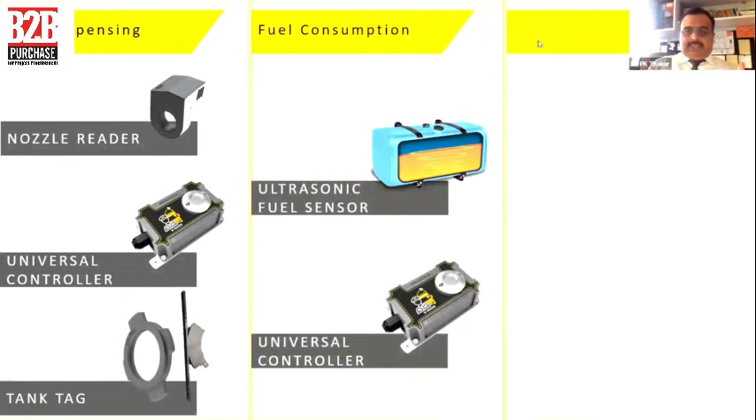So these are very small components which are being used along with the equipment to achieve this. We can see some nozzle readers, a universal controller, tank tags, an ultrasonic sensor, and some iButtons.

So in one set of equipment, we have to install these ultrasonic sensors, the universal controller, and these iButtons. And for diesel dispensing purpose, we have nozzle readers.

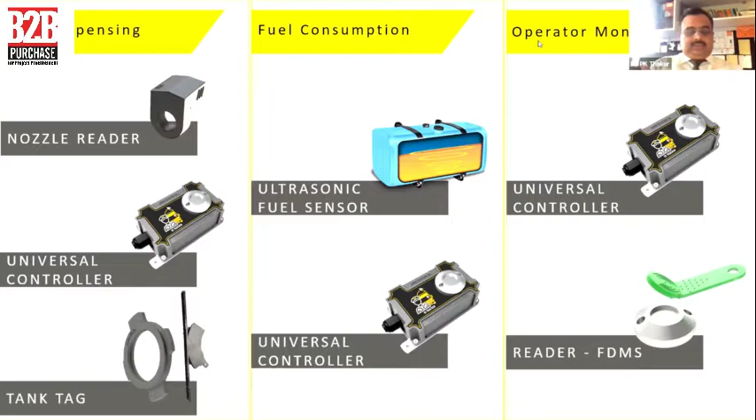And of course, in the fuel tank, we have tank tags, which are already fitted permanently with the equipment, which cannot be altered, which cannot be removed, which cannot be reutilized. This is one-time fixed, and if somebody is trying to remove it, it cannot be done.

So these are the four components which I mentioned, and this is a universal controller where the signals from these components are coming and being accumulated here, and this data is bidirectional, which is accumulated at the cloud.

Of MOVA, and in column 3 you might have seen this is SAP data, and through a tunnel this some very restricted data is being transmitted and shared with mobile cloud, and similarly from mobile cloud data is also transmitted to our GRIL cloud.

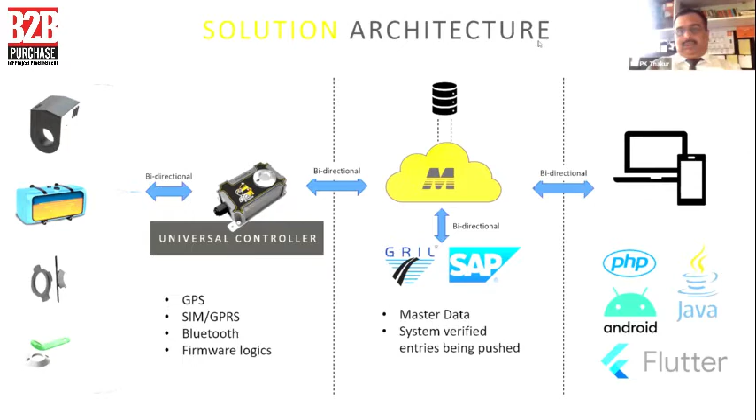So this is bidirectional data, and from this we can read or monitor either through desktop or through an app application on a mobile through Android.

So this is the dashboard where we club all this data together and finally monitor it in one glance. Here we have data of equipment monitoring, here we have operator monitoring, here how diesel dispensing is being done, how fuel average is coming up for all the equipment, all the assets of the company all together in one room.

If there is any fuel drop, which is basically, in other words, we will say a fuel theft, and how we are monitoring this, and some GPS alerts are there, of course, which is giving an administrative control on the equipment, on the vehicles, which is being monitored, their movement, their operations, their idling, their breakdown, and all.

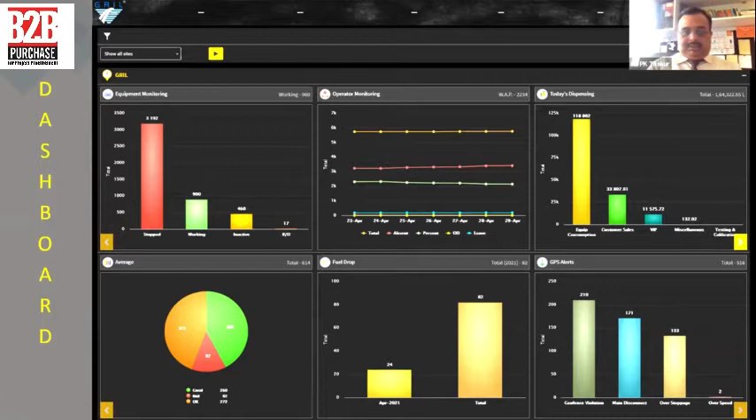And of course, the preventive maintenance. So all these 5-6 issues for which we are struggling at site level, we tried to provide a solution all together at one platform under one umbrella.

So here, this is the equipment real-time monitoring, how this is working. And we can find that out of the complete list or set of equipment, 2701 equipment is stopped as of now. Similarly, 1382 is working, some are idling, some are on breakdown, and so on.

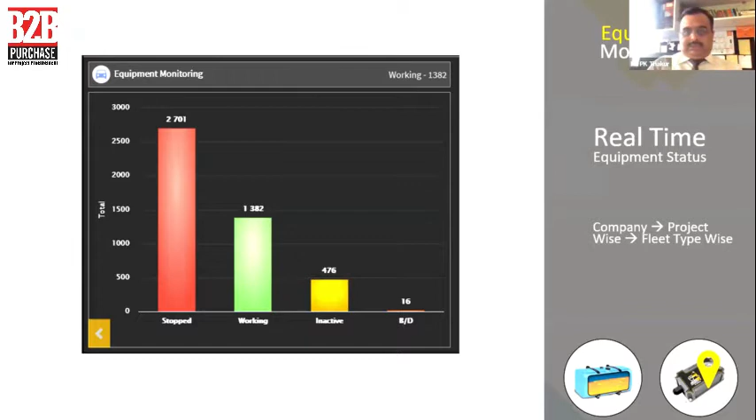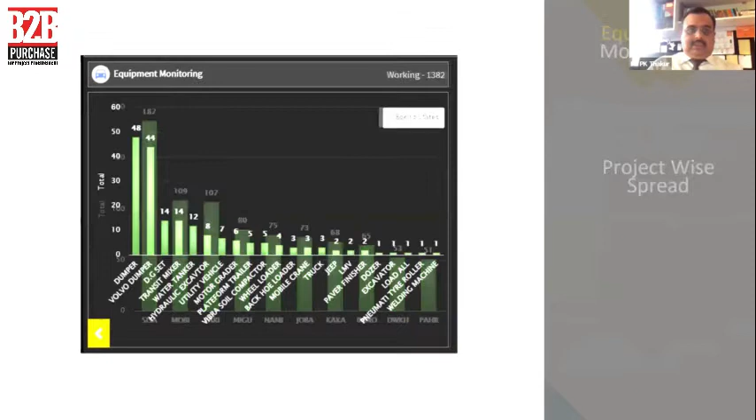Next, if we see the equipment which are working, project-wise, we can see how the equipment are working. Now, at one particular project, if we go through the class-wise equipment, which is dumpers, excavators, and many more other classes or categories of equipment, we can see how these equipment are spread on one particular project and how many are working.

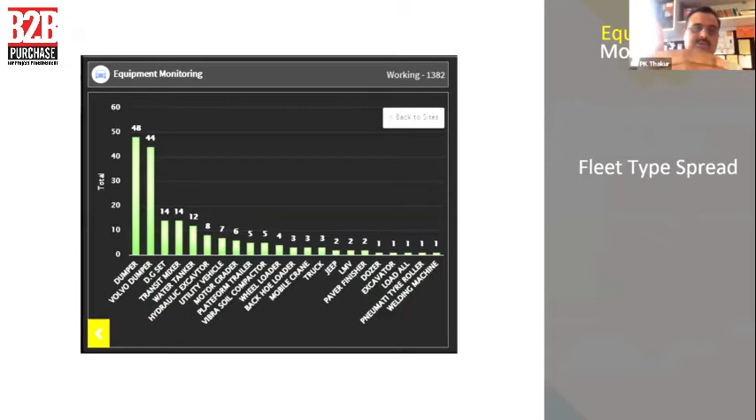Similarly, the same thing is there for manpower monitoring. Almost little less than 6,000 manpower we are having in our plant and equipment division, which is connected through this system.

And as shown on the right side of the screen, there's an individual iButton issued to individuals, all employees, whoever is the operator or driver. This iButton is fixed in the cabin of the machine.

And once this iButton comes in contact with this central controller, the machine will be started. Only then will ignition start. And once the ignition starts, immediately this information will be recorded in the software that this particular person has started the machine, and his attendance starts.

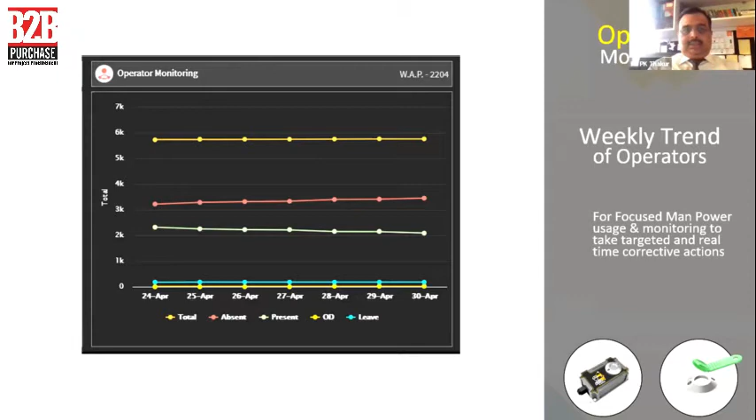So based on that, we can see how many manpower we are having, how many are working, how many are absent, how many are on outside duty, or if somebody is on leave. So this data can be captured and analyzed further.

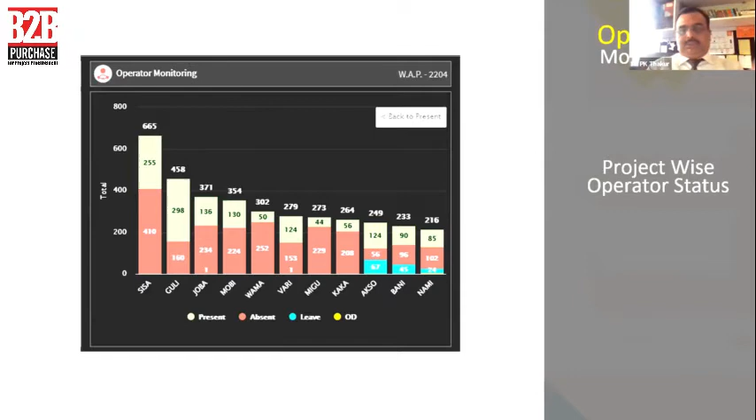Same data can be presented in this way for various projects - how many persons are present, absent, or project-wise distribution of their operator and manpower. Similar is their availability, if we want to see on weekly basis, monthly basis, half-yearly basis, or annual basis.

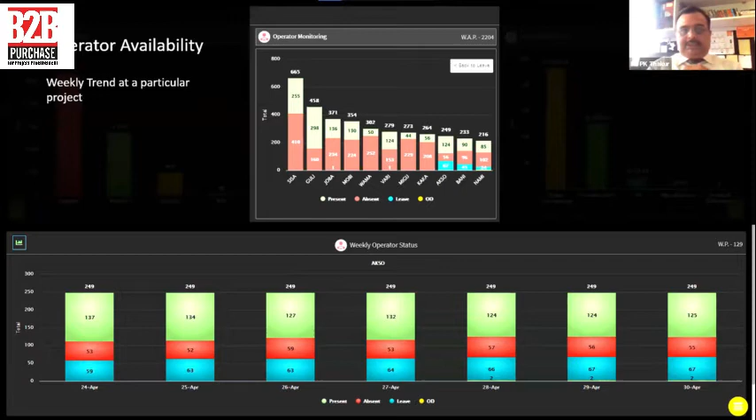So here is a sample which we have presented here just for 1 week - how many manpower, what is the trend of attendance we are having at various projects.

And if we want to drill down furthermore, we can see the individual manpower, their leave, their absent, present - so all are connected up to the bottom level. So a person sitting in the head office, if he wants to find out the detail of all 6,000 manpower they are having in that team, they can drill down very well and find out ultimate information up to the last manpower in the team.

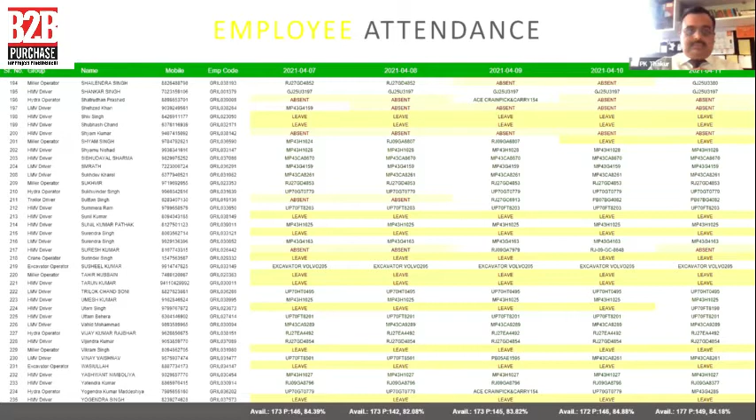So through these three small devices, we can capture all this data, and we can find out how much quantity of fuel is dispensed in our equipment, and how much we have given to others, meaning some contractors or maybe some individuals.

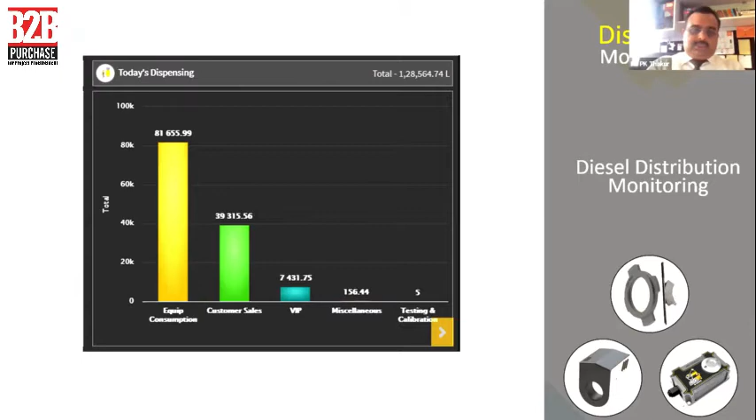What is the distribution of fuel? If you want to see project-wise, this will be like this. If you want to see class-wise, this will be like this. And if you want to see how this was distributed along with individual equipment, we can find out very well.

So we can find the data of 1,28,564 liters which was distributed on that particular day, from that level down to individual level - in which equipment, at what reading, how much quantity of fuel we have dispensed.

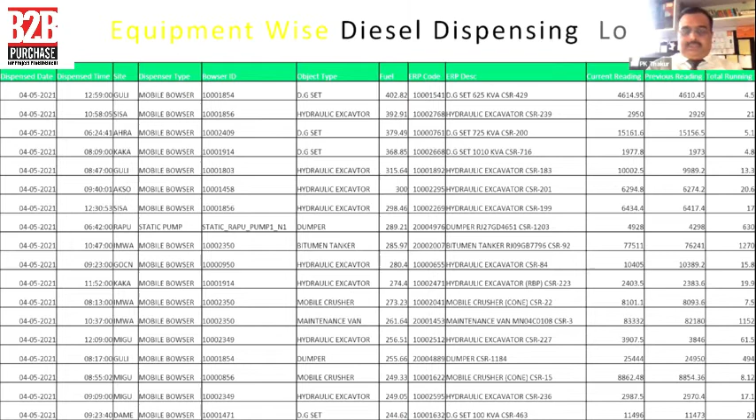Similar is the analysis of fuel average. We have categorized and given a certain margin for some - for example, take an excavator. If we take a minimum or maximum limit of the fuel average, a range of, say, 12 to 14 liters - if it is good within that, then beyond that it will be bad, and if it is in between, there is a range marked okay.

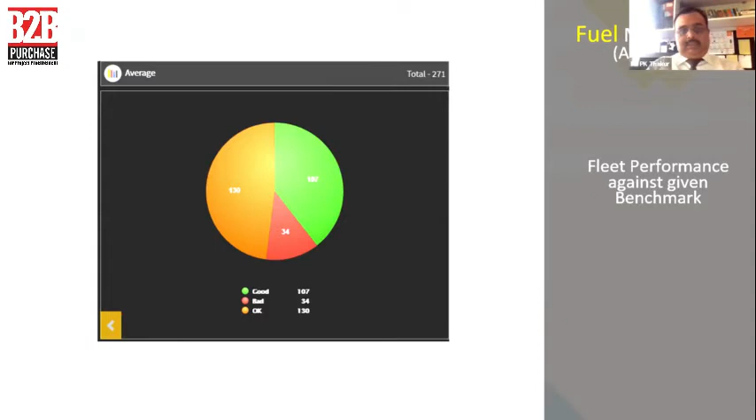So this can be classified in this way, and this data, as I mentioned earlier, can be picked from that level and shown here. Similarly, for all projects we can find out. For all class of equipments, we can find out for that particular project.

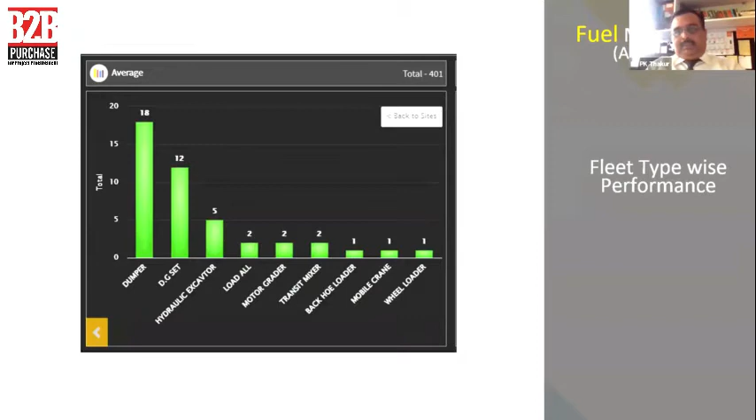And then similarly, if we want to see the bad average - earlier we had seen the good average, which was well within our range. If we see where the fuel average is not as per expectation, then this type of images will come.

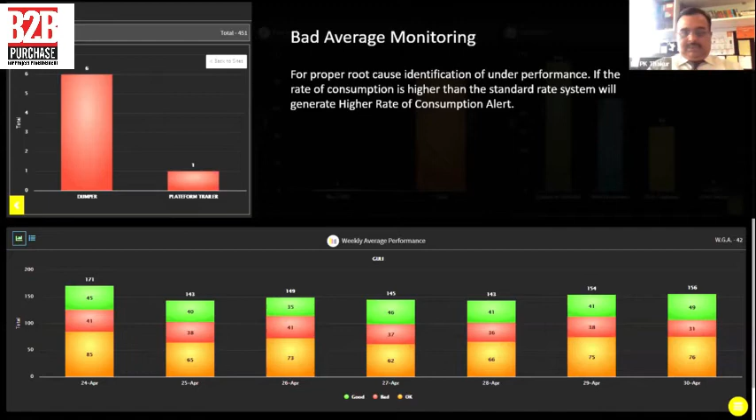For bad average, we can further drill down and see for which equipment the fuel average is bad, why it is not in range, what reading was there, how much fuel was dispensed. In one glance on an Excel sheet, it is visible.

We can export this data by Excel, in Excel form, by mail also. So for analysis purpose, we can further drill down.

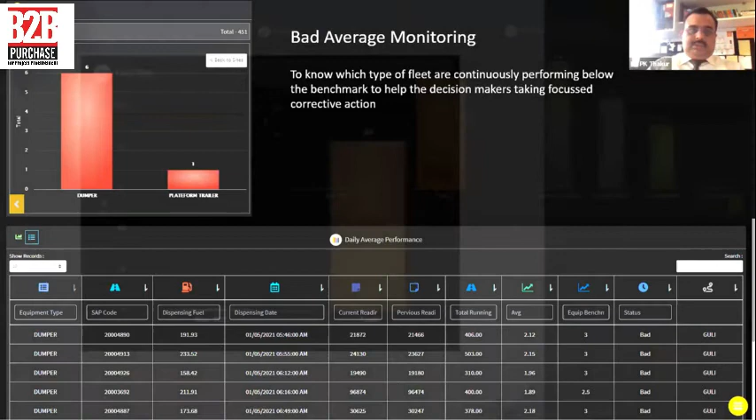Similar is for fuel drop. Fuel drop means, in simple language, if there is some pilferage of fuel, we are recording here. So we can see for the last 1 year, a total of 83 cases were recorded, and in this month of May, one case was already recorded.

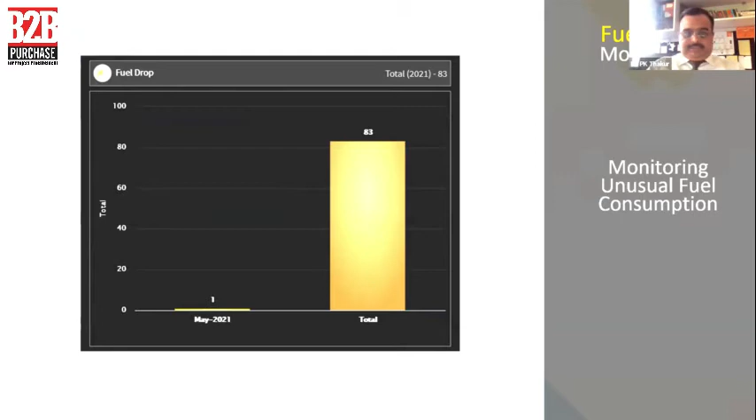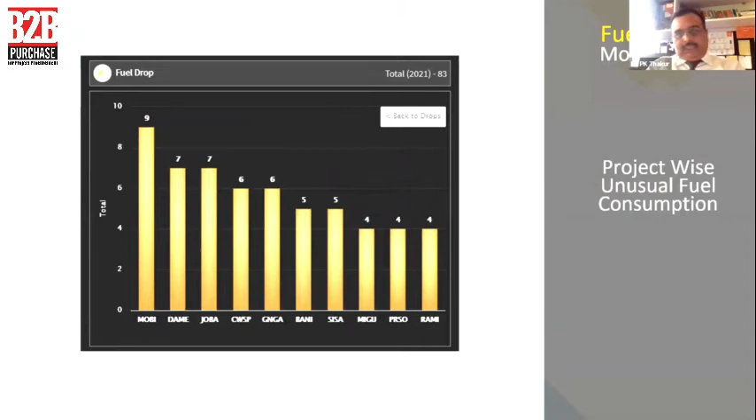Similarly, for last year, the 83 cases we had seen can be distributed here, visible on which site - how many cases occurred in the last 1 year. So it's a project-wise distribution of fuel theft.

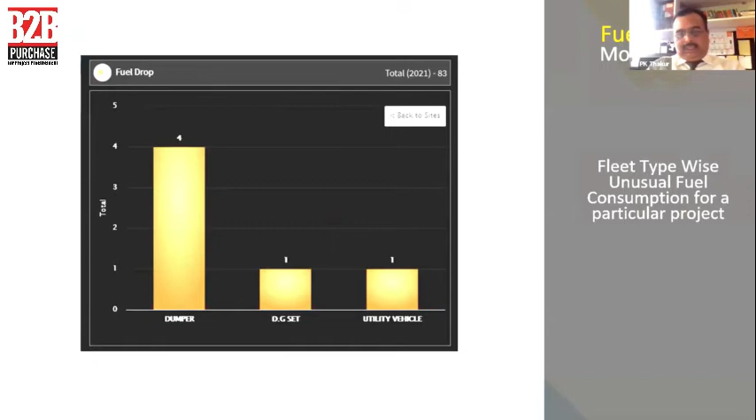Similarly, we can go and see for that particular project which type of equipment has so many cases, and finally in which equipment, at what time, at which location this fuel pilferage took place. And here is the list of that equipment.

Wherever required, we can take necessary action on the drivers and this. So this is an important feature which we have tried to capture here, and believe me, we have got a very positive response after the implementation of this.

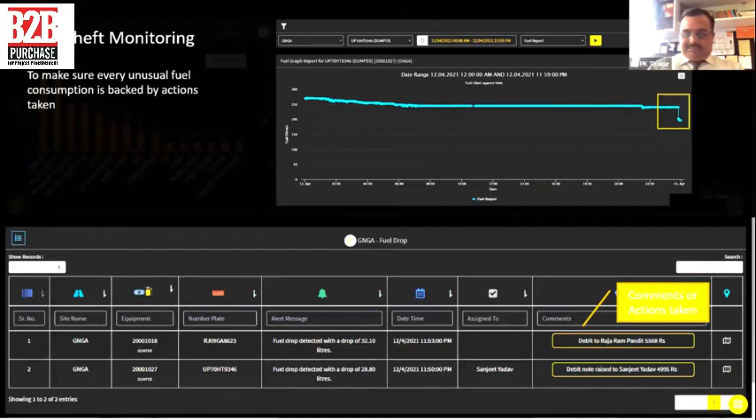Similarly there are GPS alerts. So 5-6 alerts we are getting here. We have confined the area and geofencing for all the equipment through GPS, where for our assets we can do this type of control over equipment, which is geofence monitoring.

Similarly, if the device is disconnected deliberately by operators, an alarm will be generated, and immediately a backup SMS will come on the controller's phone.

Similarly, if there is very long idling, suppose one driver is going to site, and while coming back he has parked the vehicle at some dhaba, and is staying there with the engine on, simply wasting time. So even if it goes beyond the approved idling time - suppose it's 5 minutes or 20 minutes, whatever we allocate to them, accounting for delay due to traffic congestion and such - if it goes beyond that, immediately a message will flash. So if long idling or overstopping of the vehicle is there, a message will come up.

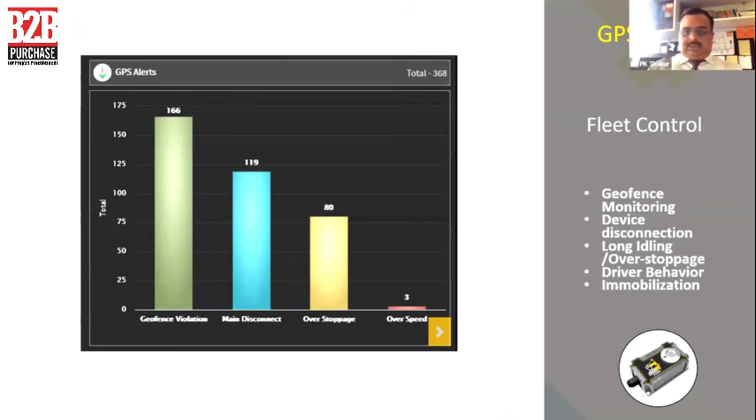Similarly, we have very well defined the area as a geofence, and if the vehicle or machine is going out of that geofence without authorization, this machine has the feature to immobilize it. Sitting here in office, we can switch off its ignition, and the machine will be parked there only - it will not move further. Once the immobilization command is given, it cannot go beyond 200 meters further.

This type of geofencing is shown here as a typical example, for which vehicle or what purpose it was allocated, and if it is within satisfactory range, very fine. If it's not as per our satisfaction range, then we can switch it off. So we have very precise administrative control over equipment through the system.

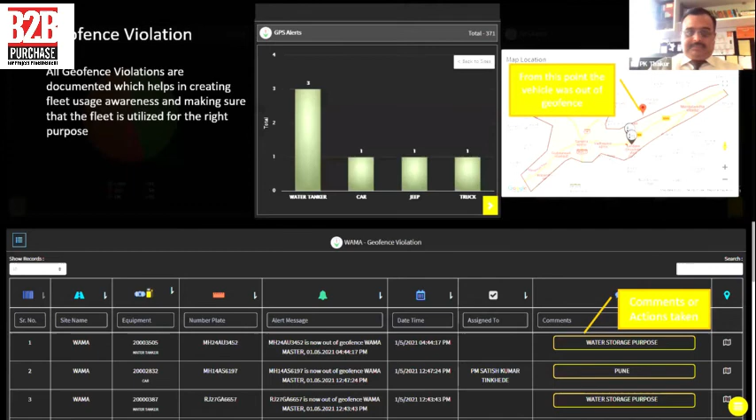Similarly, for preventive maintenance, the working hour data and the duration of change interval - these two data points are fed into our SAP through our PM module, and as I mentioned at the initial stage, through this tunnel this data is transmitted to the MOVA cloud, where this analysis part is done.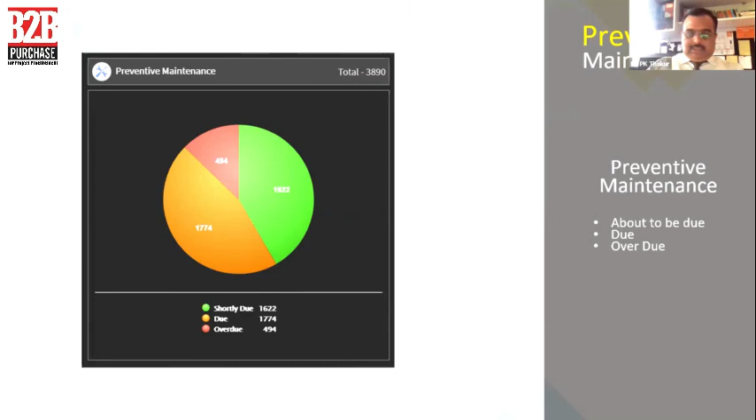So we have divided this maintenance tracking because our concern is whether it is really going to be overdue, or whether it is due, or yet to be due - the purpose being that the machine should not run overdue. Periodic maintenance has to be carried out as per OEM's prescription and exactly on the due date. So we have divided it into three parts, and further we can see on which side this overdue status is.

For example, this one project is Guli, where 165 cases are shown overdue. So immediately we can contact our site team there to find out why this is overdue - whether spares are not available, filters or lubricants are not there, there's a manpower problem, or nobody is taking care of the machine. This pain area can also be captured here.

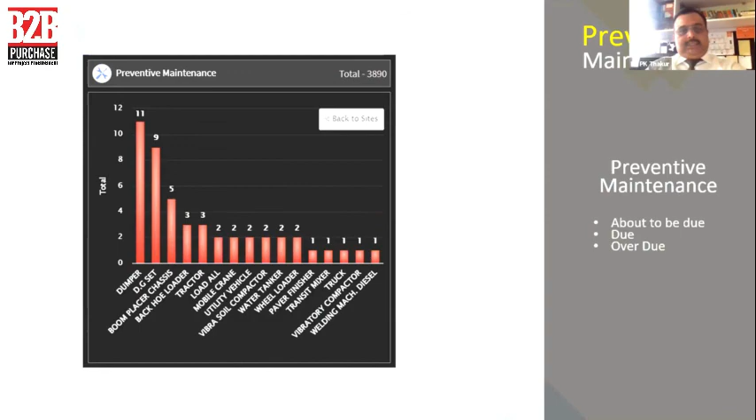Similarly, we can further drill down on one particular project. For example, in Guli, we can cascade it further and see it equipment-wise. So on that one set of equipment which was DG, 9 DGs were shown overdue, and these are those 9 DG sets.

So we have tried to cover all these 5-6 pain areas, which are really a headache for our asset managers at the site level, where there is huge scope of improvement and where a large amount of money is involved. So our management is also concerned about that - it should be controlled, and it's our moral responsibility also to control all these things.

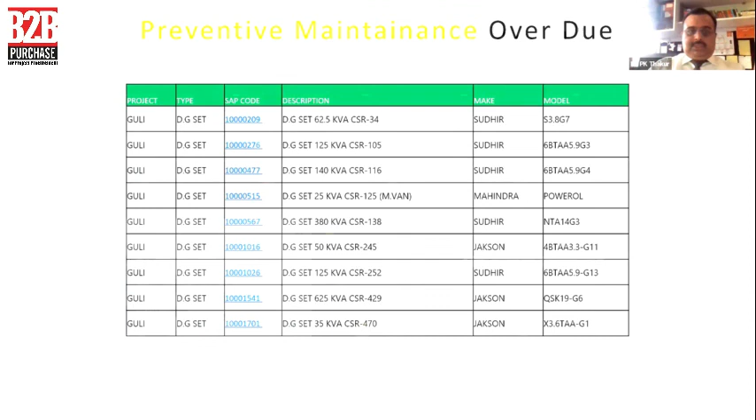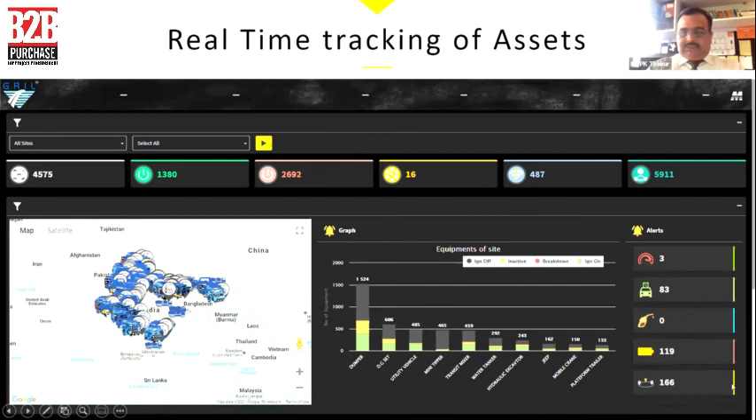So we can very well see if there is any alert - over speeding alerts are shown here, idling alerts are shown, fuel theft alerts, geofencing alerts, disconnection alerts, and so on. Holistically, if we see this, we have tried to cover all this pain area with the complete gamut of these 5-6 features.